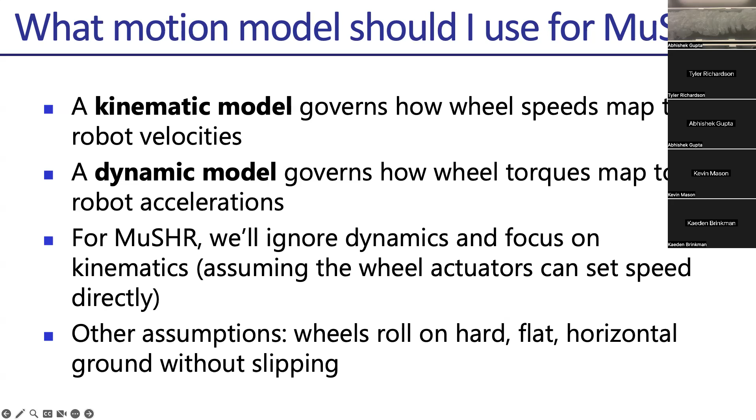The dynamics are more difficult, but we're going to assume that the wheels don't slip, right? So you're not sliding around, you're not drifting. Drifting is hard. So no drifting, no slippage. And so we're just going to cover kinematics. And we're going to directly actuate the velocity and steering angle. We're not even going to touch things like motor torques. Okay. So let's get straight to it.

So what we want is to define this model F, right? F takes in your current state X, your action U, and tells you what is the rate of change, right? So it tells you what X dot is. X dot is dX/dt, the derivative. So what you want to define is how do X and U map to the change in X? What is the change in state?

Now, what is X and what is U for a race car? For a race car, X is going to be the state, which is the current X coordinate, the current Y coordinate, and the heading. So you want to say, if your race car is faced at an angle, what is the X and Y, and which way is it pointing?

And what are your actions? They're going to be velocity in a straight line, like how much velocity you're going to apply to the wheels, and your steering angle. So your velocity is going to be V, and you're going to have your steering angle there. And so to instantiate this in the context of the race car, we're going to say X is x, y, theta, U is V and delta. And we want to figure out how does X change given a particular x, y, theta and a particular V and delta. Does that make sense?

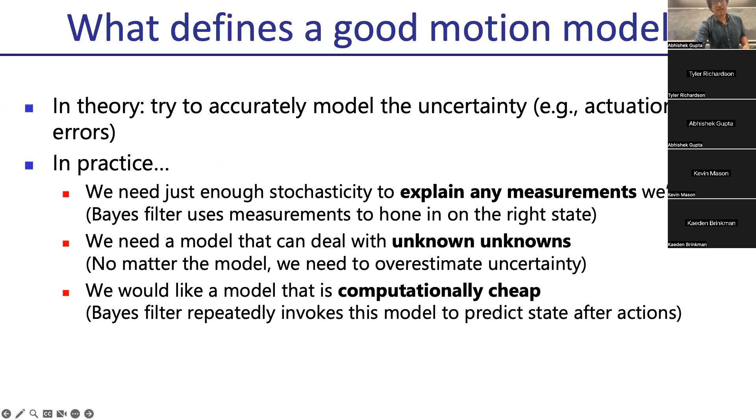Now, this is going to be a derivative. So here I've defined this as a derivative, and a derivative is the instantaneous change. We're going to operate in discrete time, and so we're going to convert this derivative into a change in X. And so earlier we had talked about our motion model as this: x_t given u_t and x_{t-1}. You can see these are discrete time steps.

And so what we're going to do is take our derivative and do numerical integration to get it over some time. The derivative tells you something at an instant. We're going to figure out what the change is and then integrate it over a bit of time to get what the next step is.

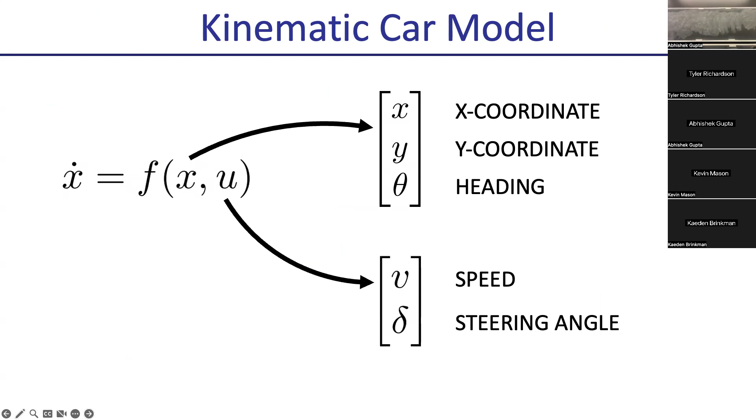Okay, so what we've talked about so far is we have a system of x, y, theta, we have actions that are V and delta. We want to figure out what the change in x, y and theta is going to be. Once you have that, you had your previous x, your previous y, your previous theta. Once you know x dot, you can figure out what delta x, delta y, delta theta are going to be, and then what the new x, new y, and new theta is. And so your motion model tells you, given a particular action, what is the change in x, the change in y, the change in theta.

But we want the models to be noisy, and so we're going to add some noise. We're going to take our motion model, which is going to be from physics, get changes in x, y, theta, and add some noise. And in your homework, you're going to add noise in two ways. You're going to add noise after you compute the next positions, and you're going to add a bit of noise on the actions. So you fed in some actions, you add noise to the actions, then you went through physics, it gave you some outcomes, and you add noise to those outcomes. So physics will tell you this, and you're going to add noise before and after. Does that make sense?

Everyone following me so far? Any questions? Okay.

So let's try to draw this out a little bit. In order to figure out the physics of the race car, we're going to start with this concept called the instantaneous center of rotation. The idea is that if you have a race car, I'm going to try drawing on my iPad again, it's not just going to go in straight lines. It's going to go in straight lines and also potentially rotate. So it's doing a rigid transformation. It's a rigid body, and the rigid body is going to have some amount of rotation and some amount of translation.

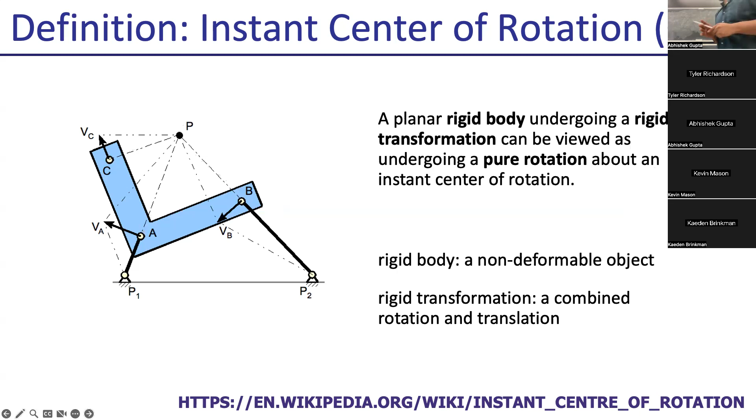So why is the instantaneous center of rotation useful? It's useful to define this model that we're going to call the kinematic bicycle model. The idea is that we're going to almost treat this car like a bicycle, because there's no slippage. So you can almost treat it like a 2-wheel system, with the front wheel like a bicycle that you can rotate. So let's try and figure out what's happening here.

For this car, our point of reference, the thing we're going to measure, is the middle of the rear axle. Let's say its position is X and Y. And let's say the frame of reference of the world has those axes. The angle of the car with the frame of reference is theta. So the state of the world is X, Y, theta.

And then you're going to apply a velocity V, which tells you what speed you're moving with. And you're going to apply a steering angle delta. Yes? Okay.

So what this is going to do is, the car is not going to go in a straight line. It's going to move in kind of a circle. So to figure out where you want to be, you want to figure out the instantaneous center of rotation, right? To figure out the instantaneous center of rotation, because there's no slippage, you're going to notice that this point right here moves like that, right? There's no slippage. And this point, because you turn the wheels, is going to move like that, right?

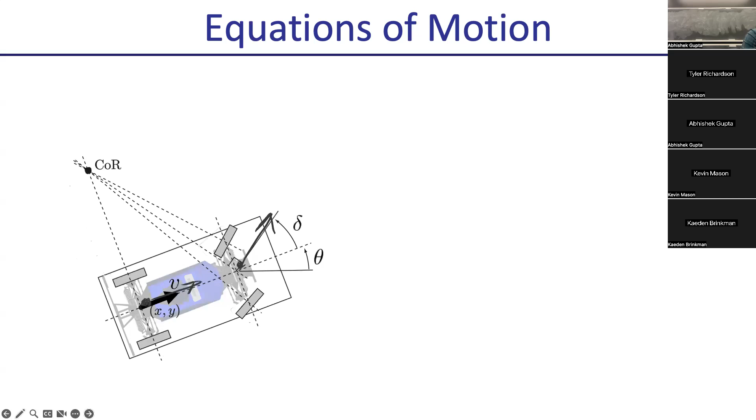And so how would you find the instantaneous center of rotation? You draw the perpendicular here, you draw the perpendicular here, and that gives you the instantaneous center of rotation, right? And the important point is that this is 90 and this is 90. Yes? So all we've done so far is define the variables of the system and found the instantaneous center of rotation, right? And let's call the length of the vehicle L. Okay, you know this, it's a race car. And let's call the distance to the instantaneous center of rotation R.

Okay. And so now what you need to figure out is what is the change in X, what is the change in Y, and what is the change in theta? Okay, right? Does that make sense as a problem definition? We've defined inputs and outputs of the problem. We are X, Y, and theta, the orientation. We're applying velocity V. We're turning the wheels by delta. This is the center of rotation that we found by drawing these perpendicular lines, right? This is R, this is L. L is known, R is not known yet. Okay? We'll figure it out.

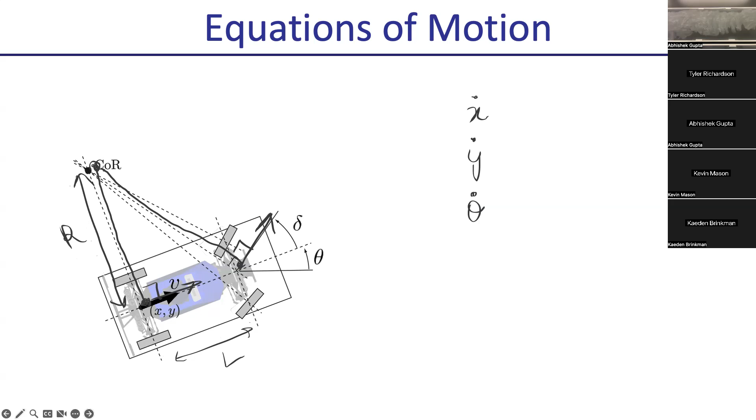And we want to figure out what is X dot, Y dot, and theta dot. So I forgot how to do this, so you all have to tell me how to do it. So how do you get X dot? How do you figure out the change in X? You get some velocity, and you're trying to figure out what is the change in X position? It's not a trick question. You know the V, you know the theta. What is the instantaneous change in X? Yeah. V cosine theta, perfect. Excellent. X dot is V cosine theta. Okay, now what is Y dot? Just say it. V sine theta. Great.

And this one is a little trickier, right? Because theta dot is you're trying to figure out what the change in angle is. So how would we figure out the change in angle? So I'll help you out with this one. Basically, theta dot is angular velocity, right? It's how much the angle is changing. So whenever you have angular velocity, physics tells you that V is equal to R omega. So the velocity at any point is the distance from the center of rotation times the angular velocity, right? So the angular velocity is V divided by R.

Yes? This is from angular physics, I don't know what the UW class is, but intro physics. And so you have V over R, right? And that's going to be your change in angle. The problem is you know V, but you don't know R, right? And so how would we compute R? So R is just this length. You know theta, you know delta, you know these are 90. How would we compute R?

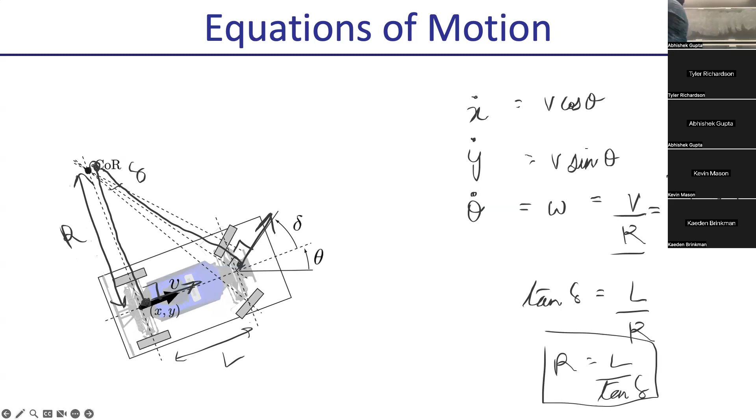Okay, so all we did is some basic trigonometry to figure out that x is going to change with v cosine theta. Intuitively, it's saying take the velocity and take the portion of it which is facing in the x direction. The y is going to change with v sine theta, right? And then the angle is going to change with v tangent delta by L because you find the instantaneous center of rotation. Okay, so you can get rid of my handwriting, and we figured it out. Great. So that's really all that the physics of the race car is, right?

So a piece of homework for all of you: we took our reference point, the point that we chose to define our x and y and everything with, to be the rear axle. You can also do it at a different point of reference, and then the instantaneous center of rotation will look different. And so you'll have to change the math a little bit. So homework for everyone is to try and work it out. You don't have to, but it'll be fun.

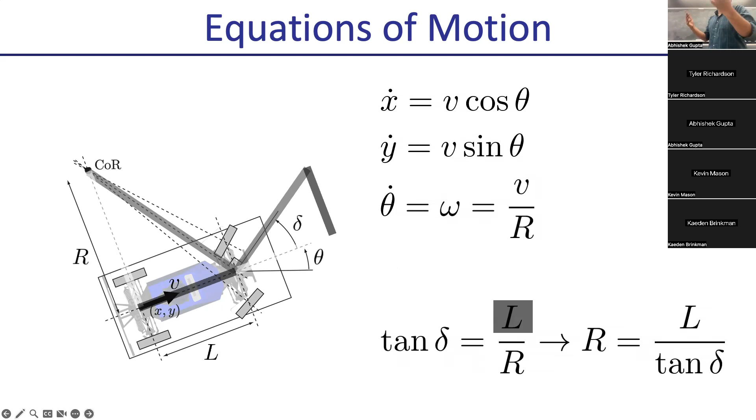But okay, so we figured out what is x dot, y dot, and theta dot, right? And now we need to figure out how to change x, y, and theta. These are derivatives. Derivatives are not telling me how much to change, right? So I need to figure out what is delta x, delta y, delta theta. So whenever you have a differential equation and you want to implement it in practice, often the easiest way to do it is with numerical integration. And so we're going to do some numerical integration.

We know x dot, we know y dot, we know theta dot, right? And we're going to work out what theta is going to be after some amount of time. Okay, so you all are going to work it out for us. So let's say we have theta dot, and we want the integral of theta dot dt from time t to t prime. So we're at time t, we're going to go to time t prime. What is this integral going to be?

It's going to be V by L tan delta dt from t to t prime, right? We're going to assume that the steering angle doesn't change from t to t prime. It's a small period of time. So this is just going to be V by L tan delta times t prime minus t, which is V by L tan delta times delta t. Okay, so that's the first one, the easiest one. So this is going to be delta theta, right?

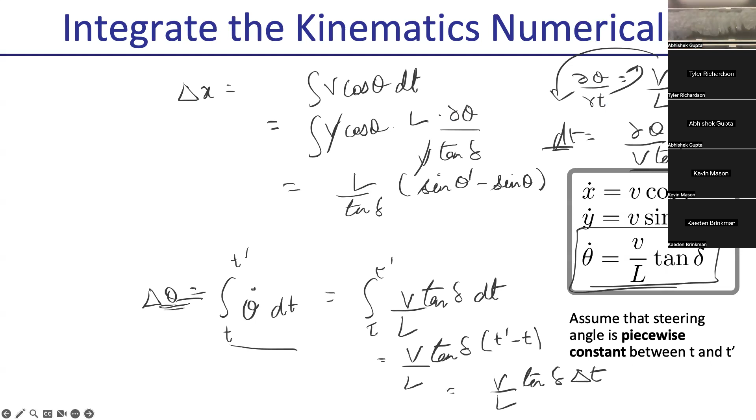Okay, how do we feel about that? Confused? All right, let's ask some questions. Or let's do it again. So how about we work through it again? I'm gonna ask a volunteer. Tell me what to do. Remind me again. Yes, Leo. Tell me how do you start it?

Okay, so we're integrating. Why do we need to integrate? Because it's instantaneous, and you want to do it over some period of time. So theta dot is the change in theta per unit time. You're going to say theta dot times dt and integrate over it. That's going to tell you the change. So you take v over L times tangent delta, multiply times dt, and then integrate it.

So you're going to have v over L tan delta. You're going to assume that steering angle is constant, so it doesn't depend on t. v remains constant, L remains constant, tangent delta remains constant. So everything comes out of the integral, and nothing is left but the integral dt. Integral dt with the definite integral is t prime minus t. And so v over L tangent delta times t prime minus t.

Okay. So that's one. And then to get delta x, you take the x dot and integrate it over time. So you integrate v cosine theta dt over time. Now, problem is theta is a function of t, and that's kind of annoying. So instead, if we write everything as a function of d theta, it's nicer to integrate. So we convert that dt to something in terms of d theta. We know that d theta over dt is v over L tan delta.

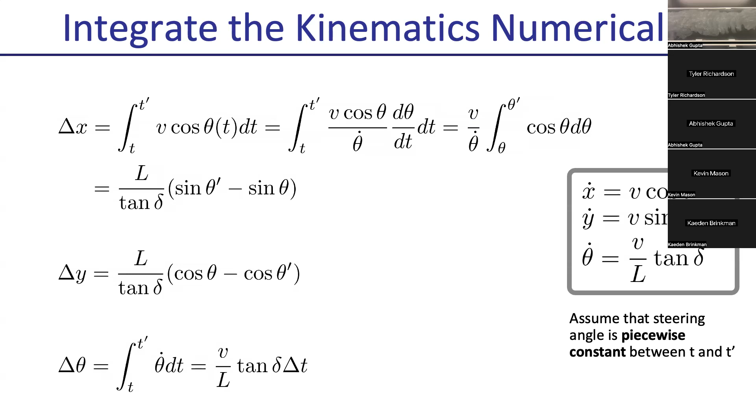Just gonna do a little bit of moving around. d theta over dt is v over L tangent delta. You move this up, you move this down, and it gives you dt in terms of d theta. So dt is d theta over v tangent delta times L. You substitute that back in over here, and that gives you your integral.

So I encourage everyone to go home, erase the board, and try to work the whole thing out from the start, from the instantaneous center of rotation to everything else. I think it'll help understand what's going on. But roughly this intuitively makes sense. That was your angular velocity. This is how much it changes. This is how much your x changes. That's how much your y changes. So that's going to be your motion model.

Are we done? Is this enough, or do we need to do more? We figured out that delta x tells me how to go from x to the next x, and same for y and same for theta. But is there more that we need to do, or are we completely done? Yes. What have we achieved by integrating? Right.

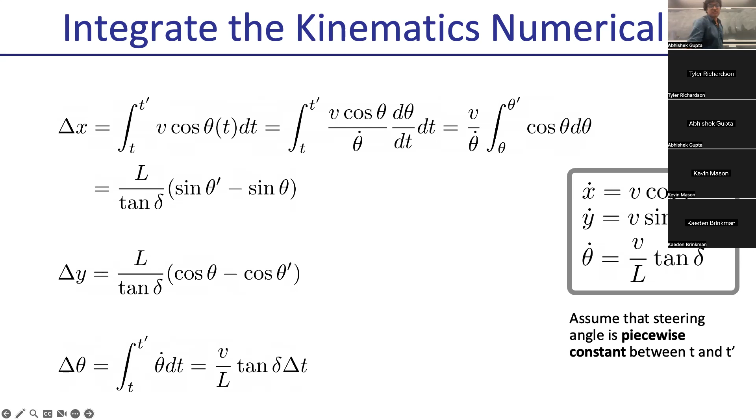It was instantaneous, so now we had x at t minus 1, and we figured out some delta for a period of time to go from t to t prime. That's how much each of these changes. So this is how much you have to add to x t minus 1 to make it into x t. Same for y and same for theta. So this gives me a model that goes from x t minus 1 to x t, y t minus 1 to y t, theta t minus 1 to theta t.

So what we've achieved is, how does the world move forward given some action, right? So if you would see, all of these things are in terms of current variables of state. So theta, v, right, and action. Delta, theta, x, y, and in terms of actions, which is delta and v, right? So you figure out in terms of current state and actions, how does the world change?

Right. Okay, but you know, I repeated noise like 10 million times at the start of this lecture, right? So the important part is there's no noise in the system, right? And so for it to be a useful model for us, we need to make sure to add some noise, right? And so the important thing here is, okay, this gave you some future x's, right? And you're going to add some noise to it, and there's two ways we're going to add noise.

The first way to add noise is we're going to add noise to the outputs. Right? We treated it like a deterministic system. This xt minus 1 went to xt deterministically. It's an equation, right? And then we're going to sample Gaussian noise from some variance, and we're going to add some noise to it. Right? And so imagine that you had a Gaussian centered around these things, and you're going to have some noise added to it from a Gaussian distribution.

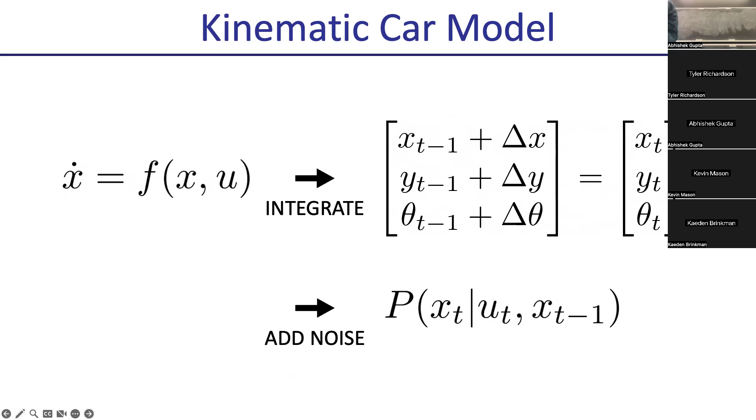Okay, so we've talked about this a bunch, but essentially the reason we want to be probabilistic, the reason we want to add noise, is because we have a bunch of things we have not modeled, right? So for instance, we haven't modeled voltage as an analog signal, it's continuous, but we've discretized it. We've had things that we haven't modeled about the slip and the friction and the issues with like gunk in the wheels and so on, right? Or battery levels, etc. And so having some noise will make your model and your planning way more robust.

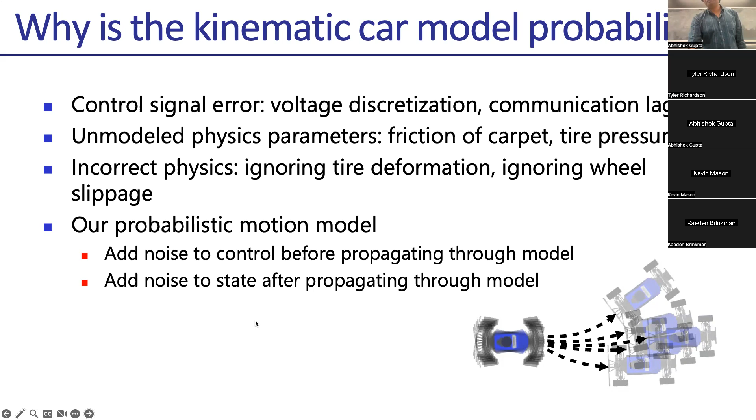So remember to add noise before and after. So add noise to control before propagating and add noise to the state after propagating, right? That's important. So essentially what it looks like is this was your car initially, that was your car at the end, you're gonna add some noise to it. And so it's going to give you some distribution of places you might be. Okay. So that is the first part of our lecture. That is the motion model, right?

So to instantiate a Bayesian filter, you need a motion model and you need a sensor model. Right, so we're going to go over the sensor model next, but how do we feel about motion models? Yes. Good. Great. Okay, so the next thing we need to figure out is a sensor model, right? So in the sensor model, what we want is a model of, what is the likelihood that I receive a particular sensor reading ZT, given that I was at some state XT in the world, right? And we're gonna assume you know the map of the world. So you know where the obstacles are, you just don't know where you are in the world. So we're gonna go with fixed map.

We're gonna try and estimate where you are in the world, given the sensor readings from a LiDAR sensor. Okay? And so ZT is going to be sensor readings from a LiDAR, XT is going to be where you are in the world. The same idea can be applied to like estimating maps too. But we'll get to that. For now, fixed map. So think about it, you know the map of the world, you just don't know where you are.

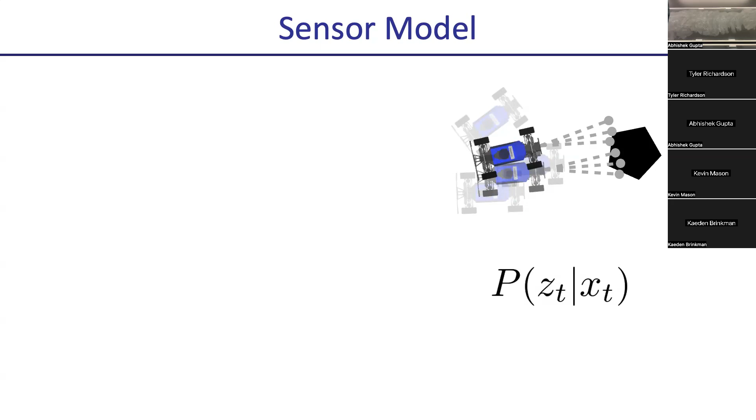And the sensor readings will help you understand where you are. And if it is not a noisy model, it will tell you exactly where you are. But because it's a noisy model, we have to be probabilistic and use Bayes rule and all the good stuff. Okay, so what we're gonna try and do is we're gonna try to use LiDAR.

And so essentially, you're just gonna have this really high speed thing shooting out laser beams, and the laser beams will reflect, and they will tell you where things are. And so LiDAR is nice because it's less affected by things like lighting conditions than cameras. Right? And so basically, it just does the thing that I just showed. It's shooting out light beams, seeing how long it takes to go and come back, right?

So what that essentially means is that a LiDAR is, where'd it go? Yeah, so a LiDAR is essentially giving you a particular, like ZT is going to be a distance, right? So it's going to say, given where you are in the world, the laser scan is going to be a distance, in a particular direction, of how far the obstacle is, right? And given a particular map and where you are in the world, you're going to have some probability over what the distance is going to be in one direction, right?

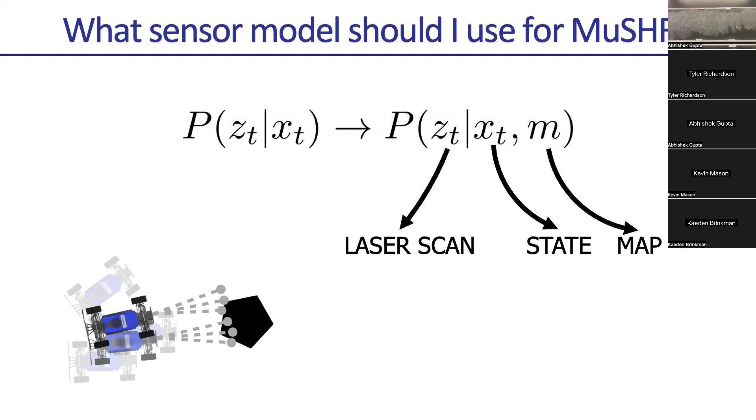Right, but if I just had one laser beam, that's not going to tell me that much. So I'm going to have a bunch of laser beams, right? And so typically a model is going to be not just one laser beam, but you're going to have K different laser beams, right? You're going to have from 1 to K, and those laser beams will go in every direction. And then the likelihood is going to be the product of the individual sensor models for each of those laser beams.

Right? So think about it: you have a car somewhere, you're shooting out laser beams in every direction, right? And depending on where you are and which direction you're facing, it's going to give you different distances, right? And you're going to take the product of all of those likelihoods, and that's going to give you the probability that you got all of those readings.

Yes? Okay, so this is not always true. I jumped from here to here. It's not always true. Can someone tell me what's the assumption? Yeah. That they're independent, perfect. So we're assuming that these laser beams are independent, right? When are they not independent? When is that a bad assumption? Well, I guess I had the answer. But yeah, when are they not independent? What can break this?

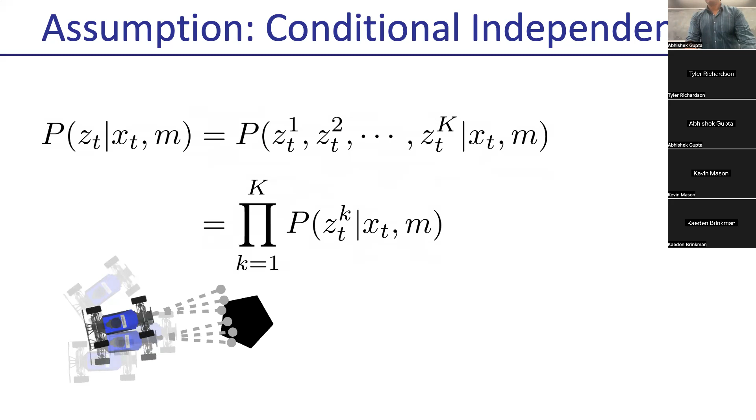Take a wild guess. Yeah. Yeah, like, they interact. Yes, when they interact with each other, or they're pointing very close to each other, they're going to interact with each other and they're no longer independent, right? So if you have things that are interfering with each other, then the readings are no longer independent. So if you double count them, this independence doesn't hold, so you get overconfident.

Right, so you want to be careful that you don't double count things and your independence assumptions hold. And so typically what you do, if you have a LiDAR facing in all directions, is you subsample the LiDAR beams. So you don't have things that are extremely close to each other, because they're likely to interfere. Instead you have things that are spaced out. So imagine you shot out 500 laser beams, you choose every fifth one. So it's quite simple, but essentially you want to shoot these laser beams out in different directions, treat them as independent. And then we want to define what is this likelihood for every laser beam.

Are there ever effects like that? Yes. And the way you kind of deal with that is you change the time step at which you do these updates. So you try to do more high frequency updates so that within the time period that you're considering, it doesn't change. It's never the case where the car is moving so fast. No, not in this car. Okay, but it's like going at the speed of light.

Yeah. Right. So this is much more of a problem in things like sonar, right? Because sonar is at the speed of sound. And so that's going to be more of a problem. Then you have to account for your own motion there.

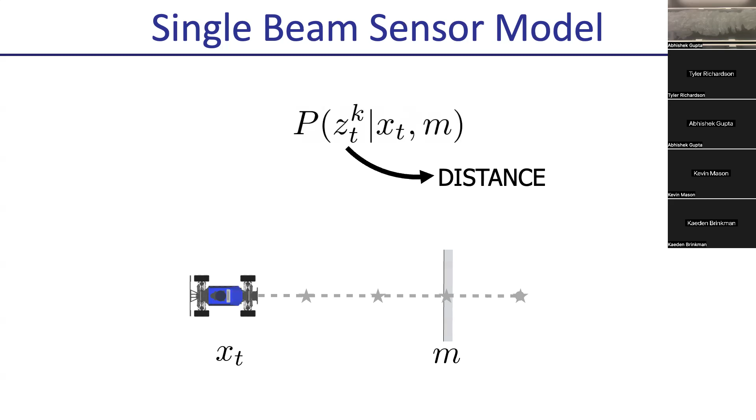Yes. So the four types of things we're going to try and deal with. The first is just some noise in sensors, right? You just have Gaussian noise in the world, things are not perfectly accurate, right? Voltage errors, sometimes the surface properties are a little different, right? And that affects how much things reflect. And so we just want to deal with local measurement noise.

The second thing we want to deal with is, let's say you had a map of the world and a person walks through the map, right? It shouldn't totally screw up your system. And so you want to have some likelihood of unexpected objects that show up in your map. The third thing we want to deal with is sometimes sensors just fail, right? Like a transparent object, or things that reflect weirdly, right? Or things that absorb light. You're going to have sensor failures, right? And so you want to be able to model some number of sensor failures and be robust against them.

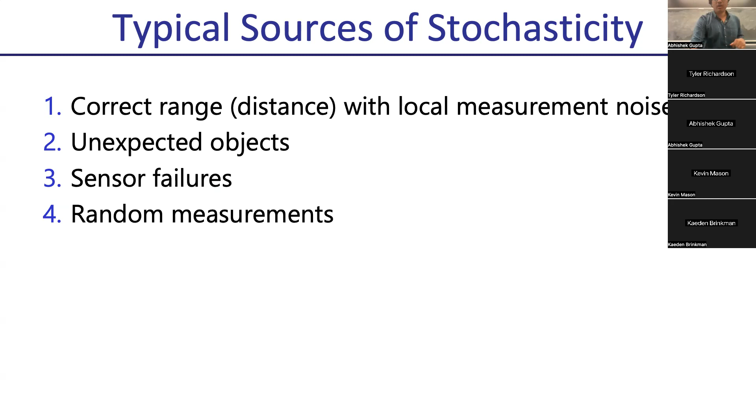And lastly, in general, it's good to have some random measurements. Sometimes your sensors malfunction, sometimes they return crazy numbers. And so we're going to try and have these four types of errors, right? We're going to have local noise, unexpected objects, sensor failures, and random measurements. Yes. Okay. So we're just going to go through them real quick.

All that local noise is saying is that if this was the distance you computed to the map, z_t^k star, right? That's the distance you computed with the perfect map. Just add some Gaussian noise to it, right? So it's saying that your thing might be a little wrong, add some Gaussian noise to it. That's local noise. Yes, so that's the probability that you might have this local noise.

The second thing you're going to deal with is unexpected objects. Right? So sometimes there might be unexpected objects, and so the distance that the map tells you might not be the distance that you actually see in the world. Right, so you want to have some likelihood that there's unexpected objects.

And so the way we're gonna try and do modeling of unexpected objects is we're gonna use an exponential distribution. And so there's a nice intuitive explanation of why you need an exponential distribution, right? It's basically saying that if there's an unexpected object, it's only gonna matter if it's closer than the obstacle, not further than the obstacle. Because if it's further than the obstacle, who cares? It's gonna bounce back anyway. So it's only gonna matter if it's closer than the obstacle.

But if you have multiple, it's going to be biased towards things that are closer, right? Because if you have an obstacle that's closer, it'll return a value. If an obstacle is further, it has to not exist at the first point and exist at the second point. And if it's further still, it has to not exist at point 0 and point 1 and has to exist at point 2. And so it's exponential because for an obstacle to be somewhere, it has to also not exist at every point before.

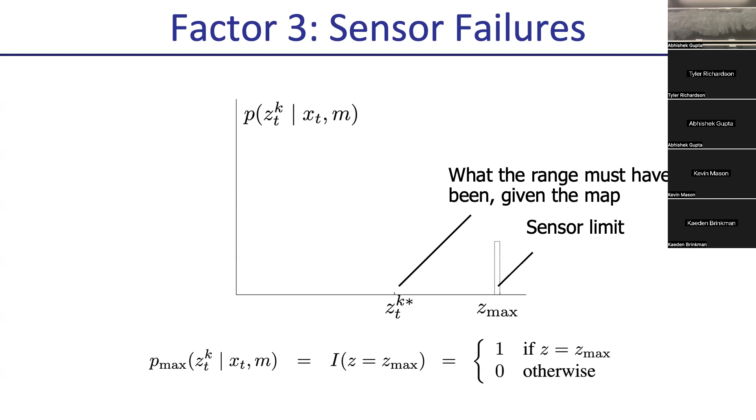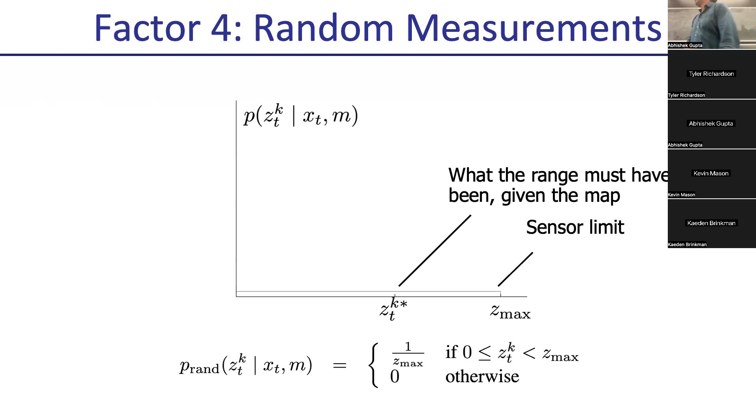And then the last type of error is that you just have some likelihood that you return a random value, uniform over the whole range, from 0 to the maximum. Okay? So the four types of errors are local Gaussian noise, which is just a Gaussian; unexpected objects, which is high likelihood at the start and then goes down; sensor failures, which just give you the maximum; and then some amount of uniform random measurements, right?

And your likelihood of a particular value here is just some weighted sum of these four types of errors. You're going to have some proportion of weights for each of them, and you sum them up. And for every system, you have to identify what these values are going to be, and that's going to be some amount of parameter tuning. But generally, all our sensor models are going to be of this form. So just think of it as Gaussian plus exponential plus maximum plus uniform.

Okay, so what we covered here is motion models, right? We're going to use some physics and add some noise to it: instantaneous center of rotation, some numerical integration, noise. And then we covered sensor models, which is the geometry and shooting beams in different directions, plus four types of noise. And that's going to be the motion model and sensor model for your homework. Everything else is less relevant. We've re-explained all of these in the homework as well.